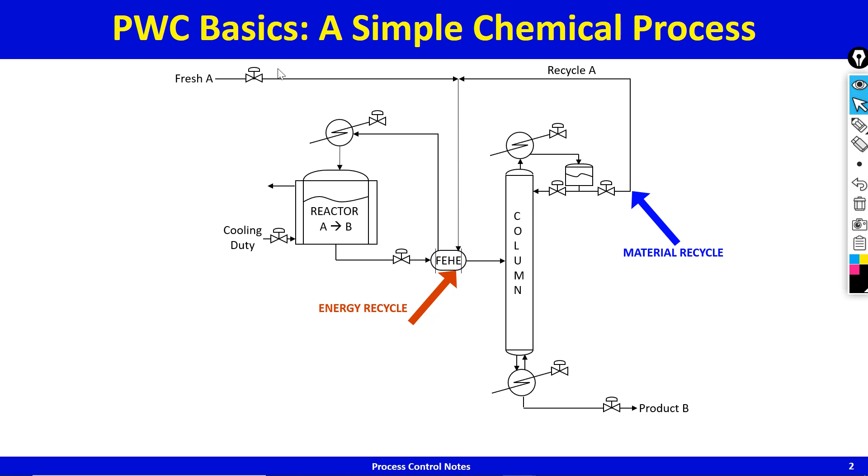The reactor effluent is hot. It loses some of its heat to preheat the cold feed, and the cooled reactor effluent then goes to a distillation column that recovers pure B down the bottoms and recycles pure A up the top. The key point to be noted, you have energy recycle in the feed effluent heat exchanger and the distillate is being recycled back to the reactor, and this is a characteristic of all chemical processes.

Process integration, it's called process integration, and it is good from the steady state operation point of view, from the profitability point of view, in the sense that material recycle minimizes the A consumed per kg B product. It maximizes the raw material utilization efficiency in the sense that every mole of A that you're putting in is leaving as product B. And energy recycle minimizes the steam consumed per kg B product.

So it makes absolute sense to have recycle, and so chemical processes are full of recycle. In fact, I keep saying this again and again, and I'll repeat, if there was no recycle, there would be no chemical engineering. So while this is good from the steady state profitability point of view, what recycle does is it creates two-way interaction, because the recycle can feed the disturbance back into the process, can feed a transient back into the process,

and that makes operation and control a challenging issue, which is why plant-wide control is not very well understood by anybody, or is very often misunderstood. I won't say it's not understood by anybody. There are people who understand it quite well, but then there are people who don't, and it is not even well covered in any of the textbooks, and so we're going to spend some time doing it, because I think this is important for anybody who wishes to work in the chemical process industry. In fact, it's important for any chemical engineer.

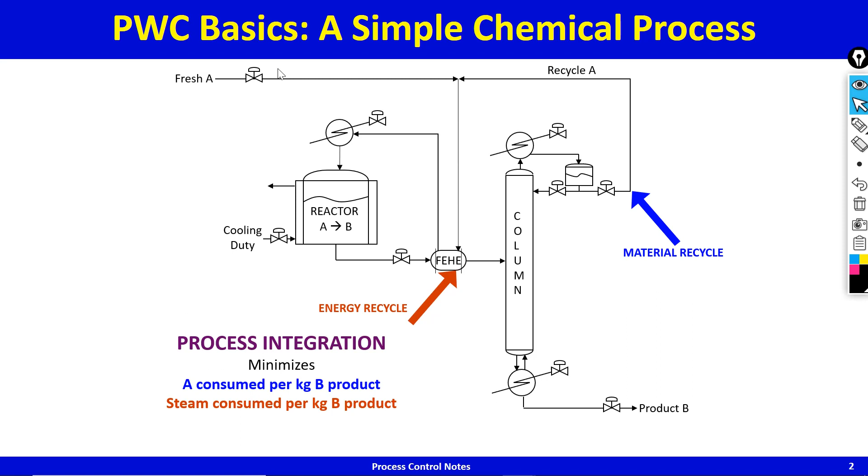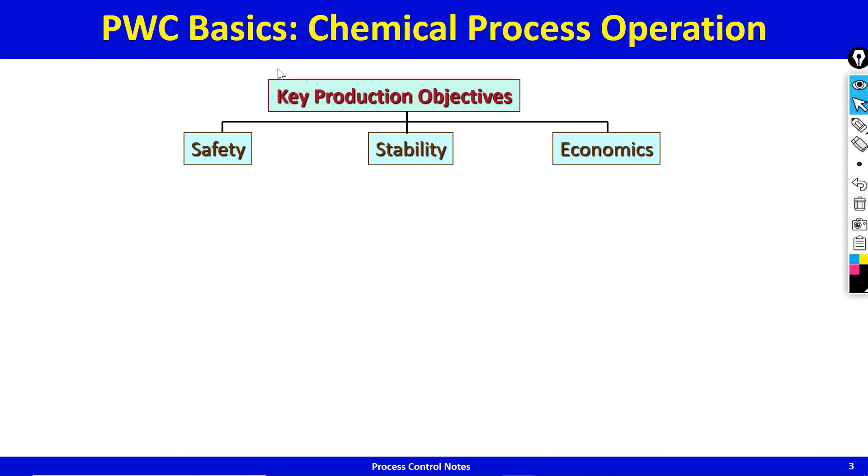So now we have chemical processes with all these recycle loops in there, and these processes need to be operated safely, stably, and economically, and economics is typically reflected in production rate, product quality, effluent specs. These need to be met all the time. We want to operate the plant to meet the production objectives all the time, 24/7. The production objective itself can change, and then there are always these disturbances, ambient conditions, raw material quality, the sensors are biased, have noise, equipment characteristics, new heat exchanger becomes fouled up over time, ambient conditions, rainy season, winter season, day night, raw material quality, very nice crude from Saudi Arabia today, sour crude from Nigeria tomorrow, but the process has to process all of this and produce good quality gasoline, good quality diesel, good quality aviation turbine fuel, and so on and so forth.

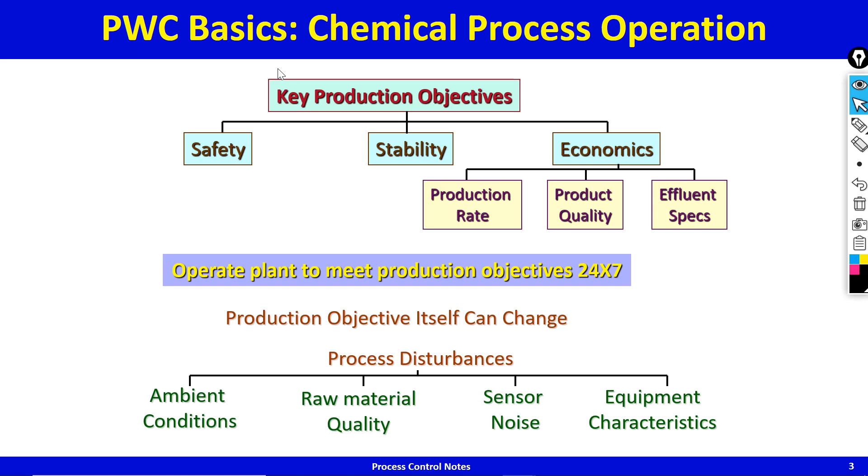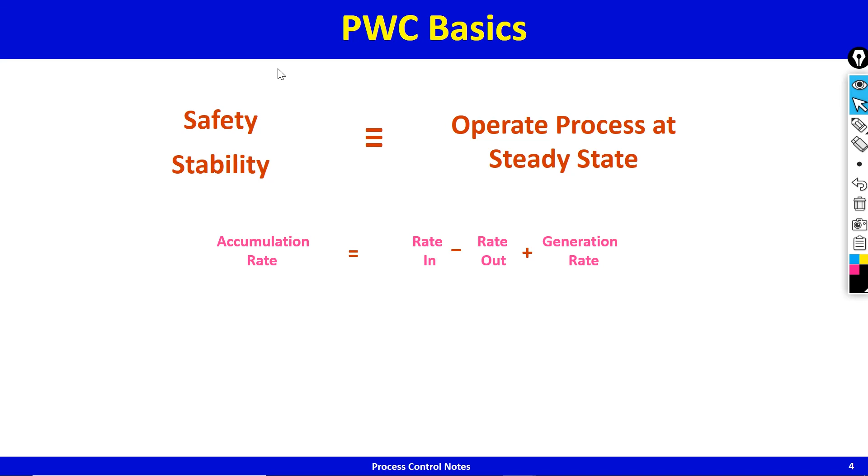Now, safety and stability in chemical engineering is typically guaranteed if you can operate the process at steady state. And how do you get steady state? Well, all that you do in chemical engineering is write balances for material, energy, components, and the accumulation rate of that particular inventory is equal to rate in minus rate out plus the generation rate of that particular inventory. And if you want steady state, this accumulation rate term must be driven to zero, and that's exactly what a control system does. It drives the accumulation rate term to zero by manipulating one or more of the right hand side terms, either the rate in or the rate out or the generation rate or a combination of the three. Usually you just manipulate one of the three.

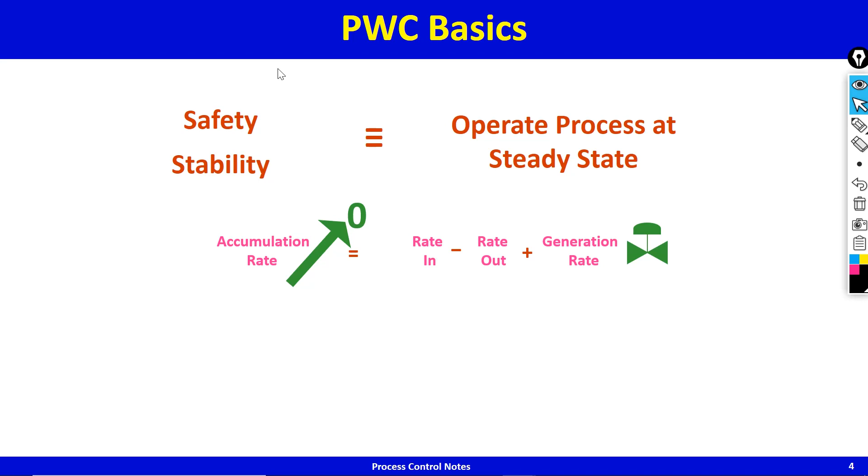So that's that. So you need a plant-wide control system at the very basic level to drive accumulation of all independent inventories to zero, and when the accumulation of the independent inventories is driven to zero, then safety and stability is ensured because the process is operating at steady state. Independent is the keyword there.

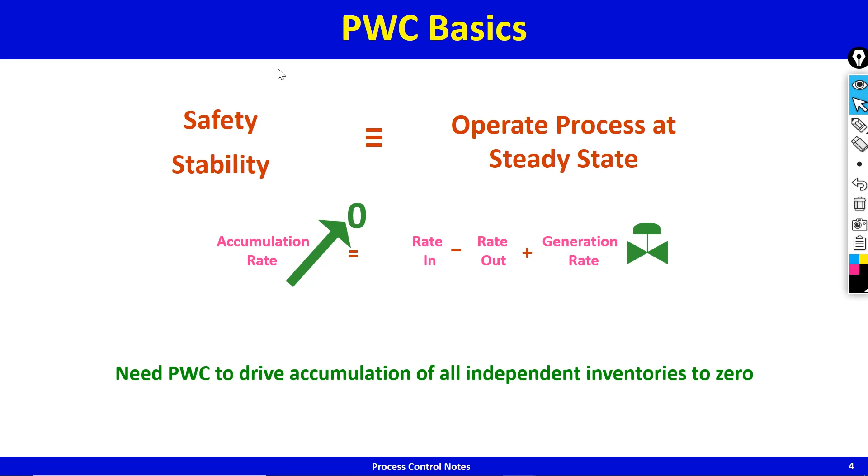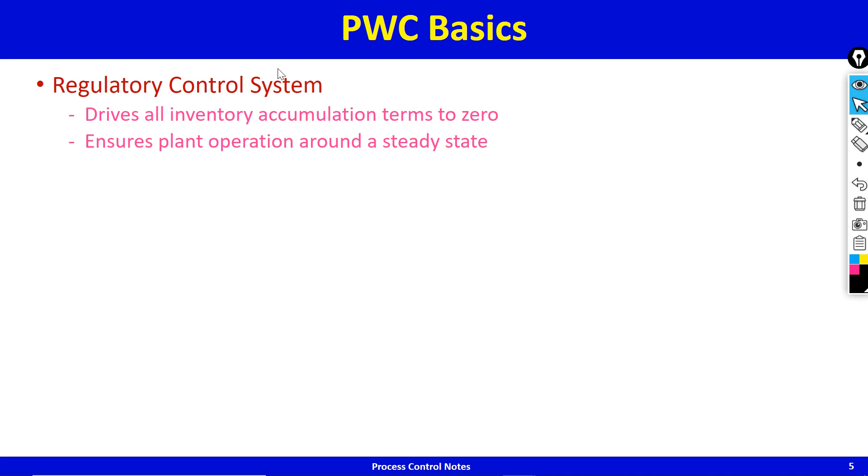So that's the purpose of a regulatory control system. It drives all inventory accumulation terms to zero, and that ensures plant operation around a steady state. And once you are assured that you can drive the process to a steady state, then you start asking the next level of question: what steady state to operate at?

For example, if you're riding a bicycle, you need to first learn how to balance the bicycle, and once you have mastered the art of balancing the bicycle, then you can start asking the question: what route should I take so that I reach from point A to point B in the least possible time?

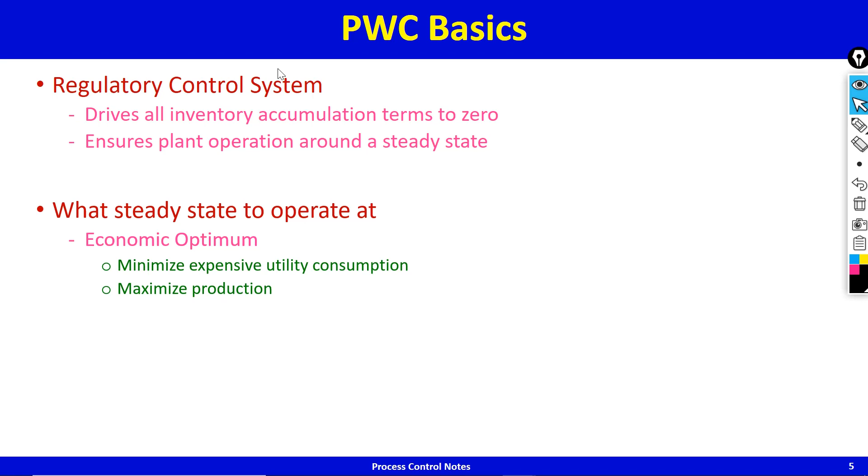Okay, so once the process has been stabilized to operate around a steady state, then you start asking the questions: okay, now I can choose which steady state to operate at, and the steady state to operate at is typically chosen to maximize or minimize an economic criterion. For example, you would like to minimize expensive utility consumption per kg product produced, or you would like to maximize production, and so on and so forth. So this is how plant-wide control systems are typically implemented.

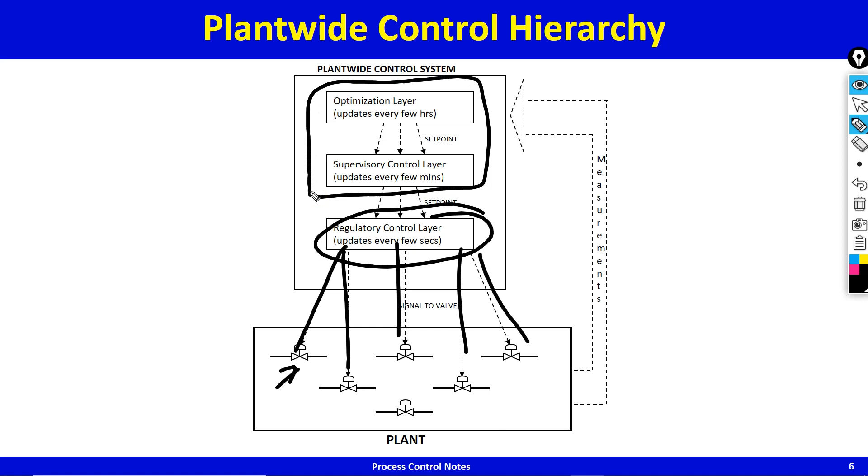At the base, you've got the control valves. These control valves are receiving set points from the regulatory control system, and the regulatory control system is receiving set points from an economic layer on top. And the purpose of the regulatory layer is ensuring steady operation which guarantees safety and stability, and the purpose of the economic layer on top is to ensure that the steady state at which you operate maximizes or minimizes, or rather optimizes, a properly chosen economic criterion.

So that's the hierarchy of plant-wide control systems, and now we're going to look at specific processes, and hopefully by the end of the course you'd be able to design a plant-wide control system no matter how complicated a process may look.

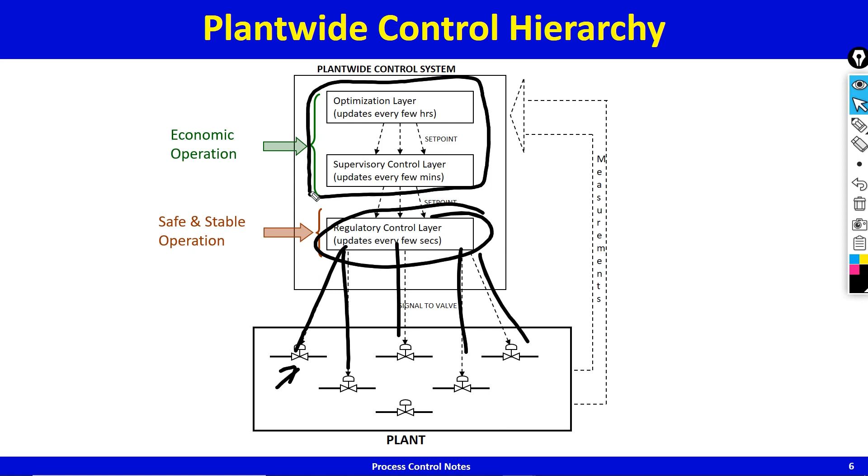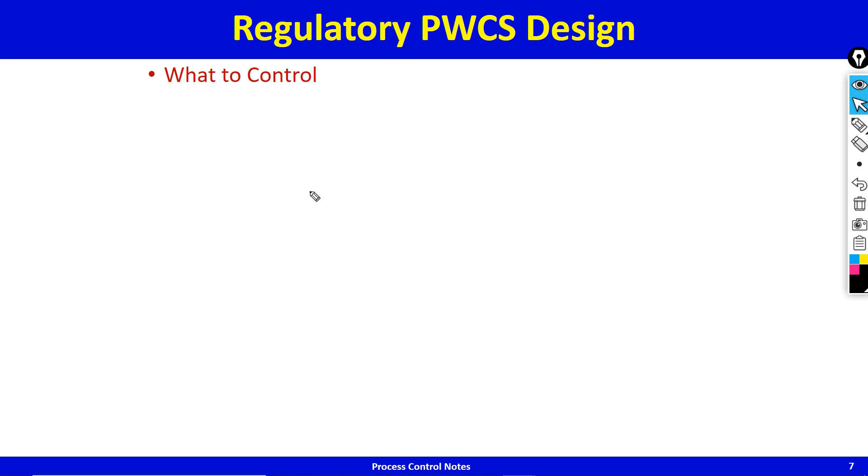Now, when you're designing a regulatory plant-wide control system, the key question is what to control. What should you control? Like we saw in degrees of freedom analysis, there exists tremendous flexibility in what to control, but purely from the regulatory perspective, purely from the perspective of ensuring that all steady state balances, all independent material and energy balances are closed, what you need to control are all independent inventories, and this is intimately linked to degrees of freedom analysis. Material inventories are typically reflected as liquid level.

If you have gas inventory, that will be reflected in gas pressure. Energy inventories are typically reflected in temperature, or if you are vaporizing something, in vapor pressure. Pressure of, for example, a distillation column is an example of the vapor inventory in the column, and if the pressure is increasing, that means you need to increase the cooling to close the energy balance, and so on and so forth. Component inventories are typically reflected in composition measurements.

On a distillation column, a tray temperature is an inferential measure of composition, in the sense that if the tray temperature is decreasing, what that means is the light key on that tray is increasing. So a decreasing tray temperature implies increasing light key composition in the tray.

Okay, so you need a good handle over degrees of freedom, and once you understand degrees of freedom properly, it is easy enough to figure what inventories to control. Then there is always the need to set throughput or production. In fact, you set the throughput first, and around that you build the inventory control system, the inventory regulatory system that will make sure that all inventory accumulation terms are driven to zero. So these are things that you need to control purely from the regulatory perspective. We are not talking about economics right now.

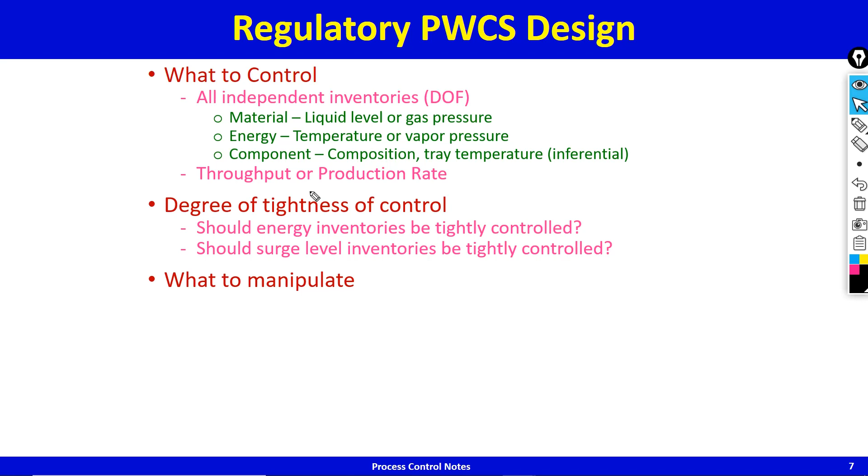Once you have figured out what to control, then the next question is what to manipulate. Well, typically if you looked at the balance, what would you manipulate? You would manipulate the largest term on the right hand side of the inventory balance for that particular inventory. This is called Richardson's rule. There can be exceptions to this, and there is always this pair close philosophy that is used.

For example, if you want to control a tank level, you're going to control the tank level using its outflow or its inflow. That ensures that when you change the valve position, the flow changes immediately, and as the flow changes, the level also changes immediately. That allows tight control. So pair close results in fast open loop dynamics, and fast open loop dynamics allows for tight closed loop control should you wish to.

Now the thing that I wanted to highlight here was that there's tremendous flexibility here, and this flexibility was partly seen in degrees of freedom analysis in terms of what are you specifying corresponding to those degrees of freedom. Are you specifying flows? Are you specifying flow ratios? Are you specifying temperatures, or a combination of temperatures, or a composition ratio? I don't know. So there's tremendous flexibility that exists in what you specify corresponding to the degrees of freedom. So what to control, tremendous flexibility exists here.

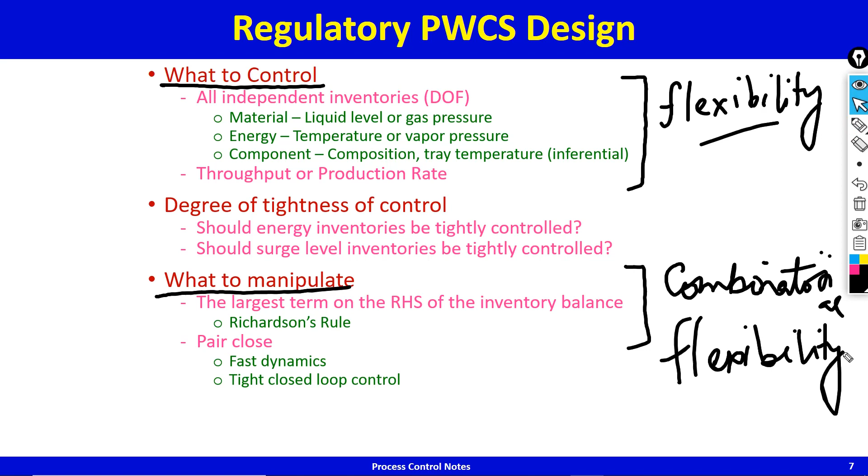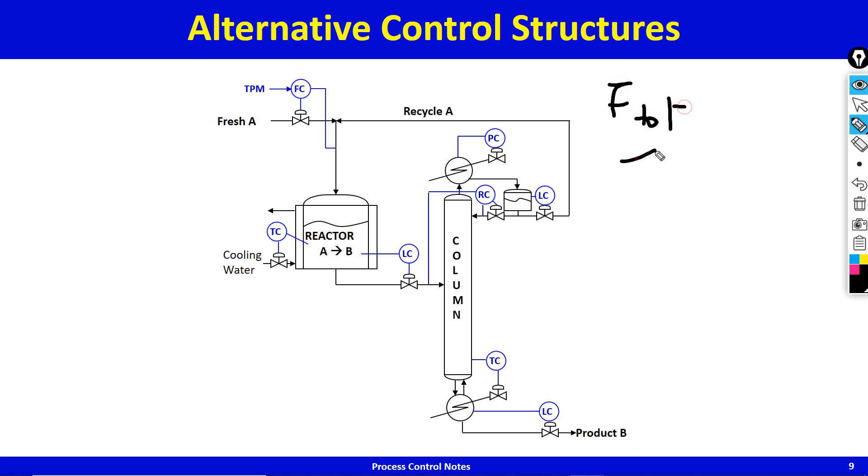So the specification set is different in only the throughput manipulator. Everything else is the same. By specification set, I mean we are specifying here F tot, T reactor, V reactor, L by F, and T column. These are the 5 steady state degrees of freedom corresponding to the control structure. In the previous case, if I go back, the only difference is instead of F tot, I am specifying fresh A feed. Everything else is the same. We can continue.

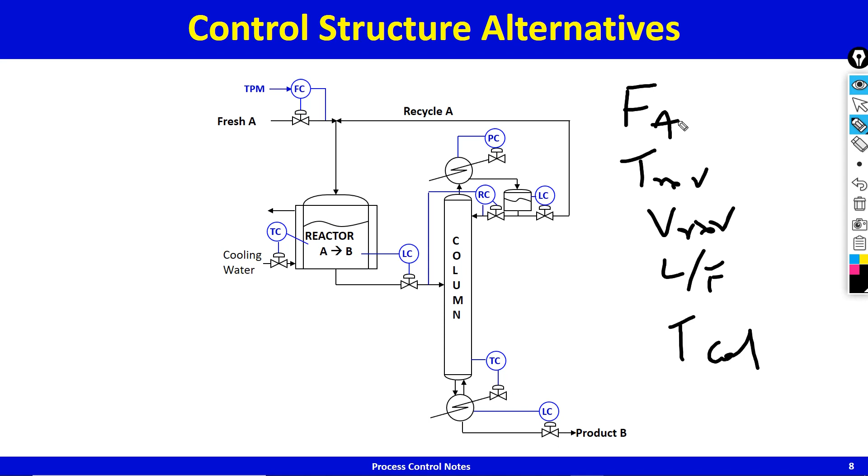In this case, the throughput manipulator is at the bottoms. So throughput is being set by the bottoms rate from the column. We'll call it the bottom rate B. And if we continue, now you see the sump level cannot be controlled using the bottom flow rate because it's already paired. So we control the sump level by adjusting the inflow, and this assumes that there are not too many trays between the sump and the feed, because if there are too many trays, then the level control will be very loose and the sump can run dry or overflow. So this assumes there are only a few trays between the feed and the bottom sump.

And now this valve, sorry, I think I made a mistake here. This valve is no longer available for level control of the reactor, so the level control of the reactor is this way. So you see, from the throughput manipulator, the orientation of the level controllers is in the reverse direction of process flow. Everything else is the same as before. So this control structure corresponds to this set of specifications. The only difference is production is being set at the bottoms rate. Okay, this will also work.

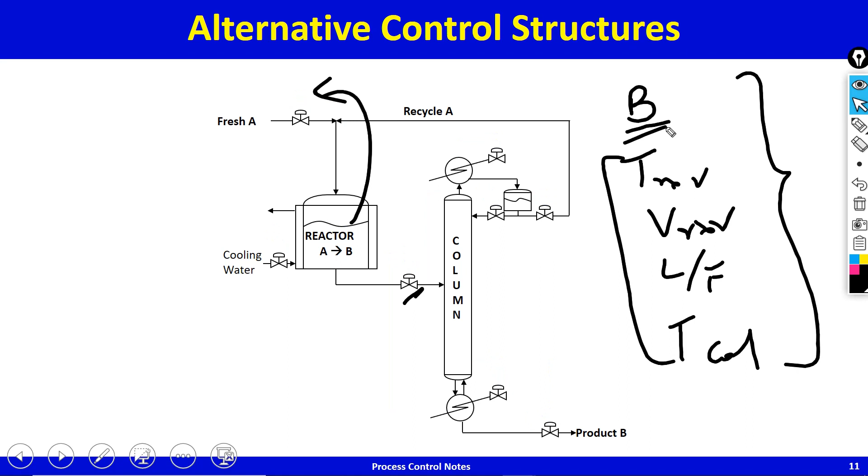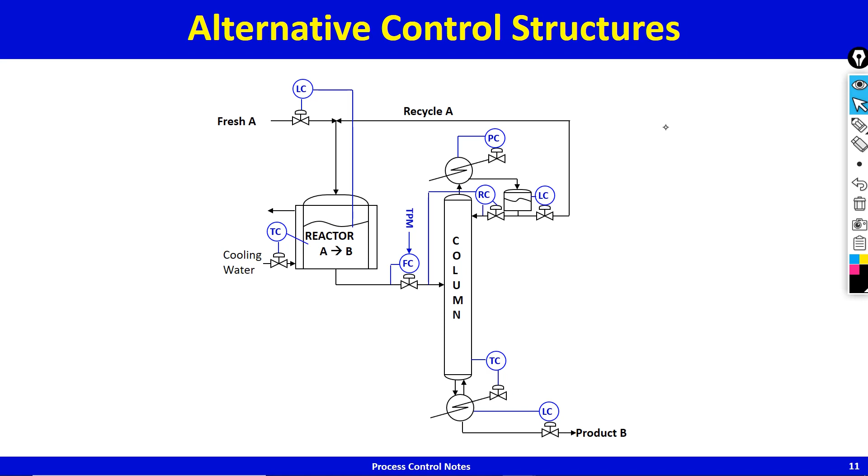You can keep going. Now we have production being set at the feed to the column, and so the level control upstream of the reactor is in the reverse direction of process flow. The level is being controlled by adjusting the fresh A feed. Everything else remains the same as in the first control structure, and in this case the controlled variables are all the same except throughput is being set at the feed to the column. We can continue.

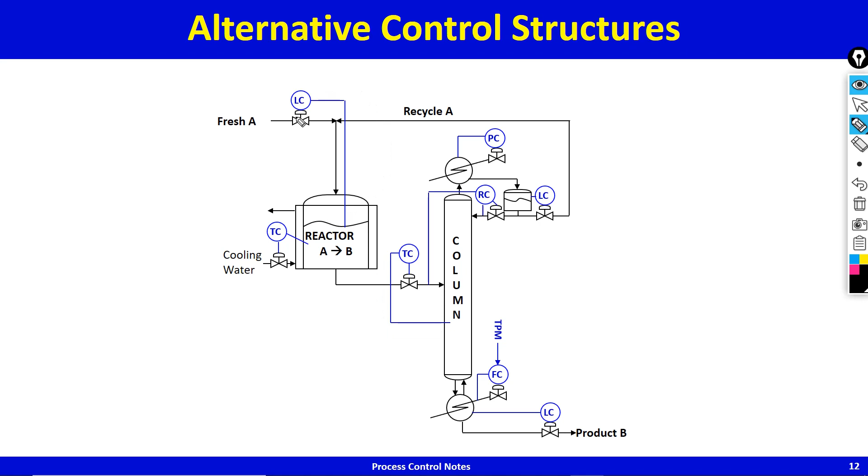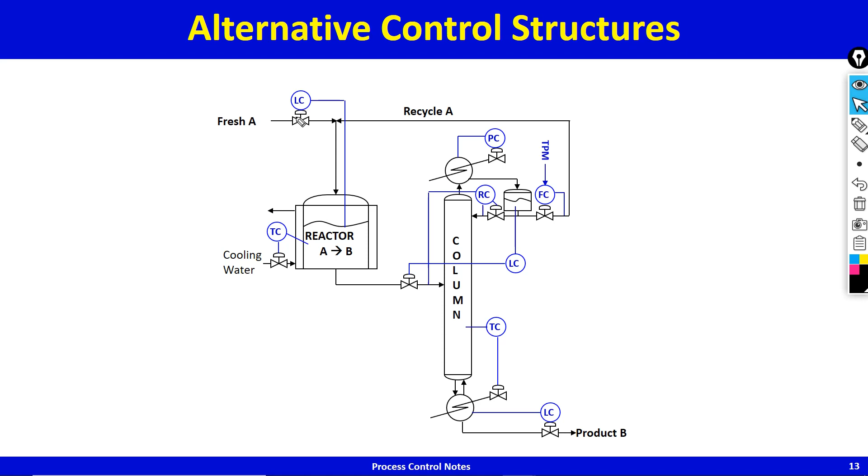You can set production as vapor boil up into the column, and now because vapor boil up is being used for fixing production, the column temperature must be controlled using the feed to the column. Level must be in the reverse direction of flow. Everything else is the same. You can go on and on and on. There's also a throughput manipulator at a recycle or the distillate from the column. I will leave the explanation to you so you can think about what is going on, but basically this is another control structure.

So the point is, location of the throughput manipulator is a key decision for inventory management. It's a key decision in the sense that wherever you set throughput, inventory controllers downstream are in the direction of process flow, inventory controllers upstream are in the reverse direction of flow. And there are several alternative reasonable plant-wide control structures depending on where you put the throughput manipulator. Which one is the best? How do you bring method to the madness? So the madness is because of two reasons. One, what to control, and two, once you decided what to control, what to manipulate. And what to manipulate is largely governed by where you are setting production. Okay, so that's the madness that we're talking about.

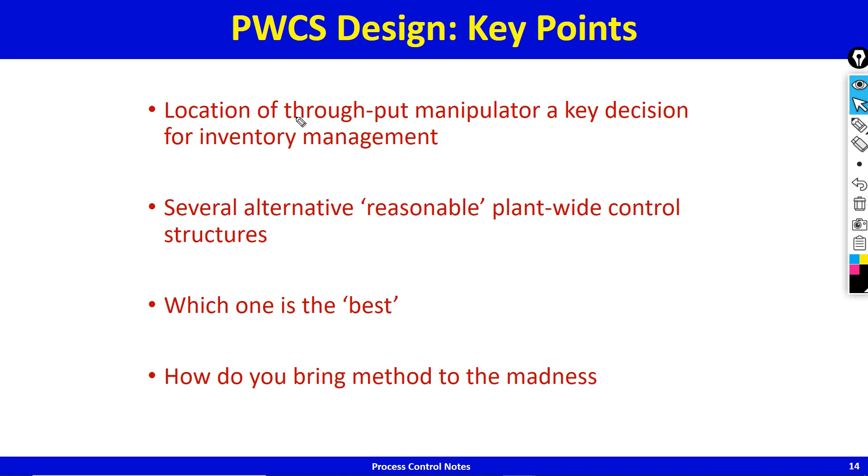Now, how do you address issues, or how do you address this madness? I refer to it as the transformation of variability perspective, and I'll explain to you what it is and then we'll carry on from there.

Very simple example, a process heat exchanger which uses steam for heating a process stream from an inlet temperature to an outlet temperature. The process stream flow can change, the process stream inlet temperature can change. If you have open loop operation, that means no control, the steam flow will be fixed.

Because the steam flow is fixed, the temperature of the stream that is leaving the heat exchanger, the process outlet stream temperature, will show variability. It will go all over the place because the process stream flow rate itself is changing, because the process stream inlet temperature is changing, and so on, because of disturbances.

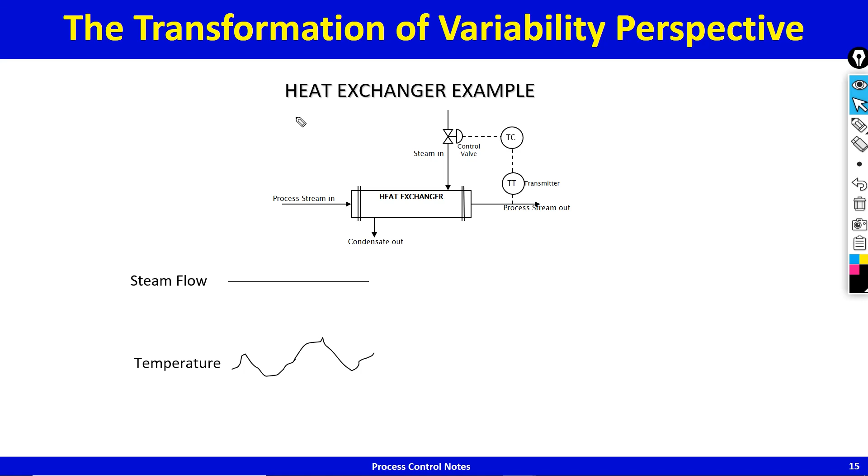This temperature controller manipulates the steam valve. Now if the temperature controller is properly tuned, what will happen is you will get reasonably tight control of the temperature, so the temperature variability will go down. And in order to reduce that temperature variability, the steam flow is going all over the place.

So in a sense, what your temperature controller is doing is transforming variability from where it is not desirable to where it is acceptable. That's the transformation of variability perspective. That's one way of looking at control systems. And this perspective is what has helped me figure out the plant-wide control problem to a large extent. I got this perspective from my PhD advisor a long time ago, and finally I do understand now what he was trying to convey.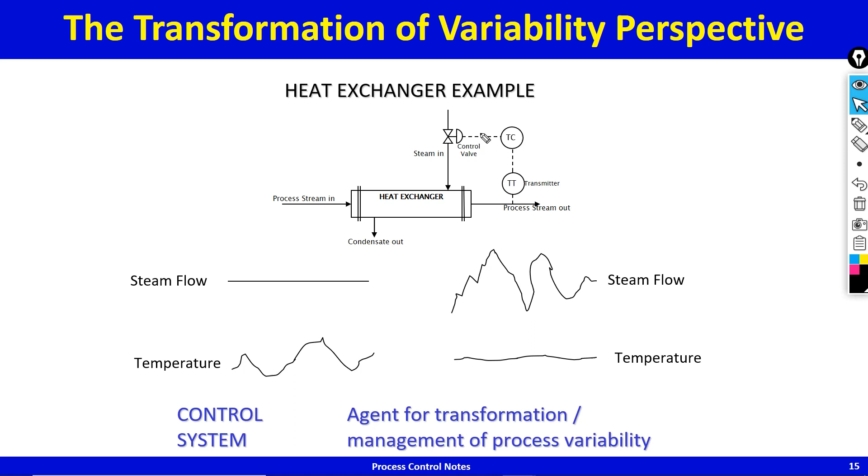So a control system is an agent for transformation or management of process variability. The key question you always ask is, where can we transform process variability? Where is variability acceptable? Surge levels, like we talked about, this does not affect the steady state, so it has no economic effect. We want to regulate it loosely for filtering out flow transients, while the high and low alarms are not breached, those limits are not hit. So variability in surge level is acceptable.

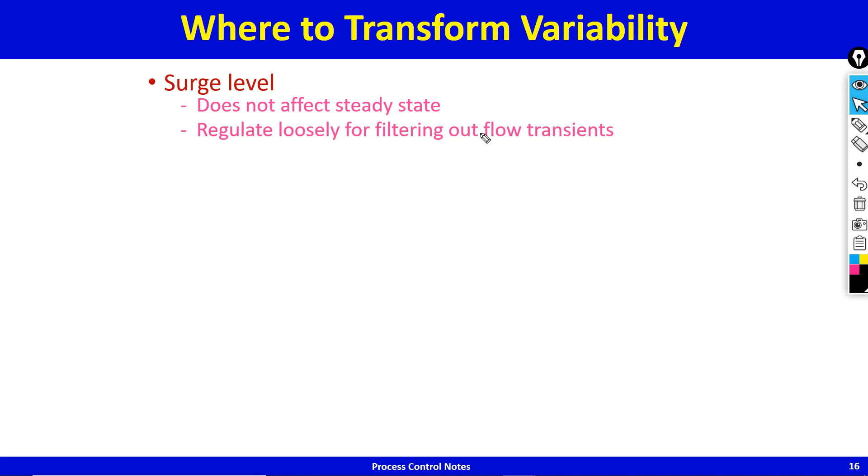Energy inventories, usually these are regulated tightly to guarantee safety because you want to avoid reactor runaway and things like that. Product quality is also usually regulated very tightly because you want to minimize free product giveaway. For example, if you have 99% pure product, you want to sell 99% pure product, 1% impurity should be there. If you are selling 99.9% pure product, then that's essentially free product giveaway.

And mind you, the premium that you can charge as the quality improves is exponential, not linear. So 99% costs X, 99.5 will cost, let's say, X plus delta X. 99.9 will not be X plus 2 delta X, it's going to be exponentially more. So the premium you can charge to the customer grows exponentially as the quality is controlled tighter and tighter.

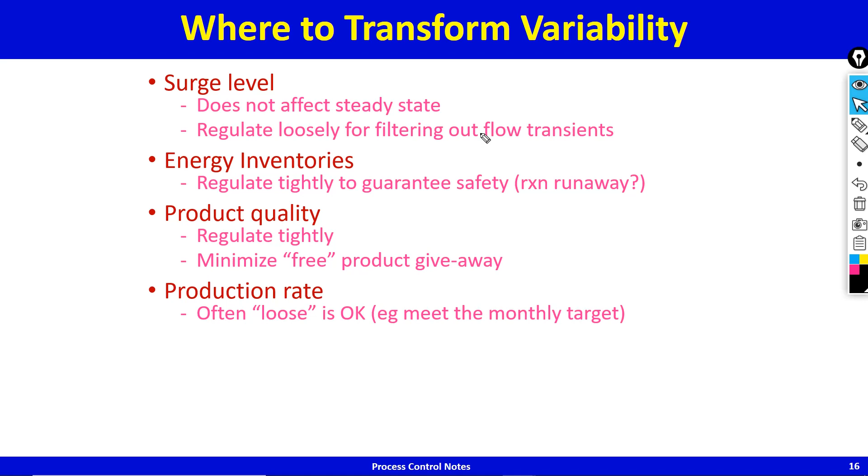Production rate, often loose is okay. For example, a plant will have a monthly target. The business side will say, our analysis of the demand supply gap says we can sell so much, so your target for this month is to produce so many tons of product. So on a daily operation basis, you don't have to operate on target all 30 days of the month. On some days you can be high, on some days low, on some days right where you need to be. So some variability in production rate is okay. Production rate needs to be controlled, but often loose control of production rate is just fine.

What about recycle loop circulation rates, or the recycle rates? Usually these need to be regulated tightly, and if the recycle rate variability is well regulated, then the recycle rate doesn't swing as much. If the recycle rate doesn't swing as much, all equipment in the recycle loop sees relatively fixed flows, and that's good for all the equipment inside the recycle loop. However, one needs to be careful in the sense that we may need to let the recycle rate float in order for the overall balance on a plant to close.

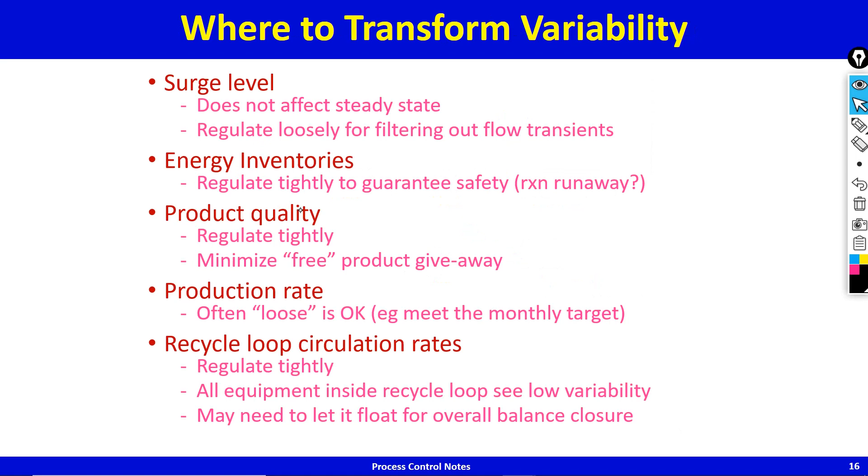We've got feed at temperature T0 coming in. Let's say the reactor effluent is hot. So the hot effluent gives some heat to the cold feed. Cold feed gets heated, and then it gets further heated to the reactor inlet temperature in a heater. The hot effluent after cooling goes to a cooler, and everything condenses. The condensate is taken out as liquid. That's the process.

Now let us say we are running the process without any temperature control. So basically the firing rate is fixed. If the firing rate is fixed, that means the energy input is fixed. Then let's say the temperature of the in stream goes up. Also the assumption is that the reactor single pass conversion is not large, maybe 30, 40, 50%, but certainly not 90, 95%. So low or moderate single pass reactor conversion. So there's enough unreacted reactant in the exit stream of the reactor.

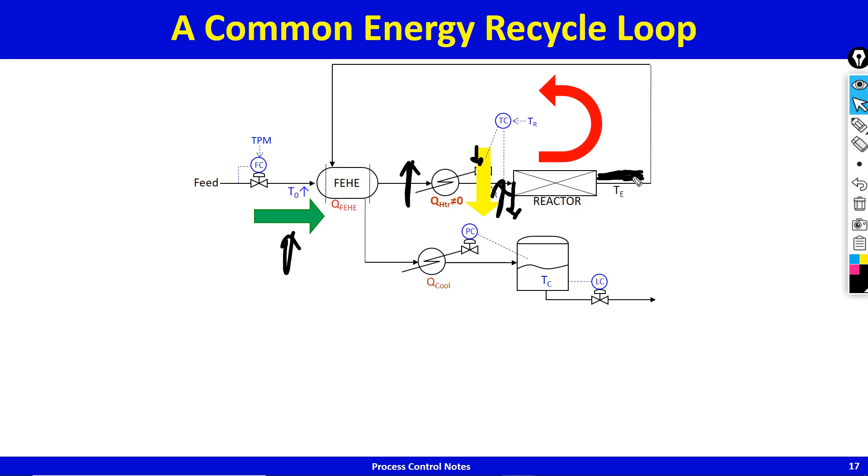It won't go as much up. It'll go up a little bit, but then it'll come back because the inlet temperature has been brought back. You see, what is happening here is the action of the reactor inlet temperature controller is transforming the energy balance variability out of the recycle loop, and this will stabilize the process. So the temperature controller transforms energy balance variability out of the recycle loop, and this actually regulates the rate of energy transfer in the feed effluent heat exchanger.

When you did not have the temperature controller on, when it was on manual, the energy transferred in the feed effluent heat exchanger went up and up and up. That's called a reactor runaway. But if you control the reactor inlet temperature, reactor runaway won't happen. I think it's easy enough to see that it doesn't really matter, as long as you control some temperature in the recycle loop, the runaway will be prevented. So that's the key message from this very simple example. You want to transform the variability out of the recycle loop. That's the message.

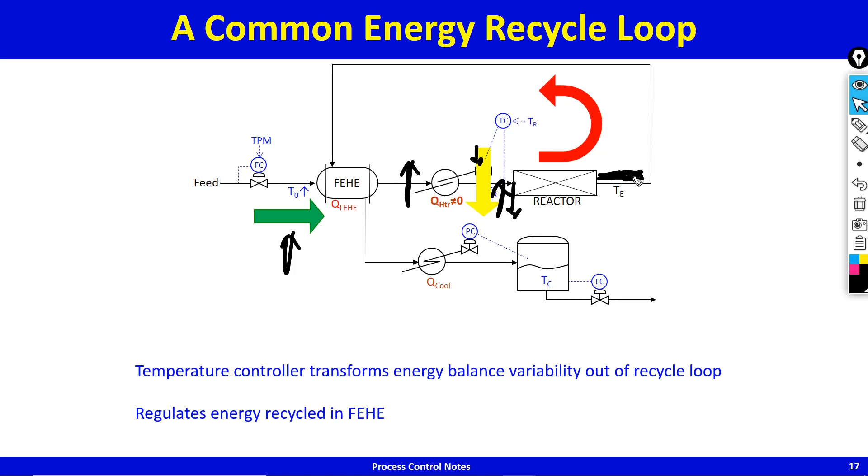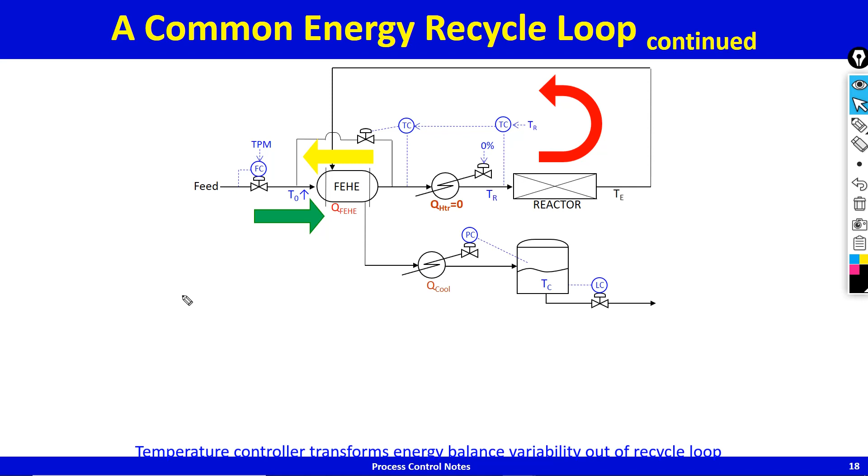Now, here's another way of doing it, and I won't go over it. Let it be. Material recycle snowball effect.

So you see, in most systems the reactor is quite expensive because the catalyst is very expensive, and so the design will have a small reactor volume and a low single pass conversion. If you have a low single pass conversion, the recycle rate would be high, and if the recycle rate is high, what you find is, if you increase the feed rate 5%, the recycle rate doesn't go up 5%, recycle rate increases, I don't know, maybe 20%. So the gain or the sensitivity of recycle rate to production rate changes is actually quite high. This is called the material recycle snowball effect,

and it's figurative. So if you're fixing the fresh feed, those are the set points that affect the steady state, then a small change in the fresh feed rate will cause a very large change in the recycle rate. This is called the snowball effect. Right now we are showing pure A. It could be that A contains a solvent and the composition of A in that fresh feed goes down or up. What that means is, if the amount of fresh A that you're putting in varies, the recycle rate will vary a lot.

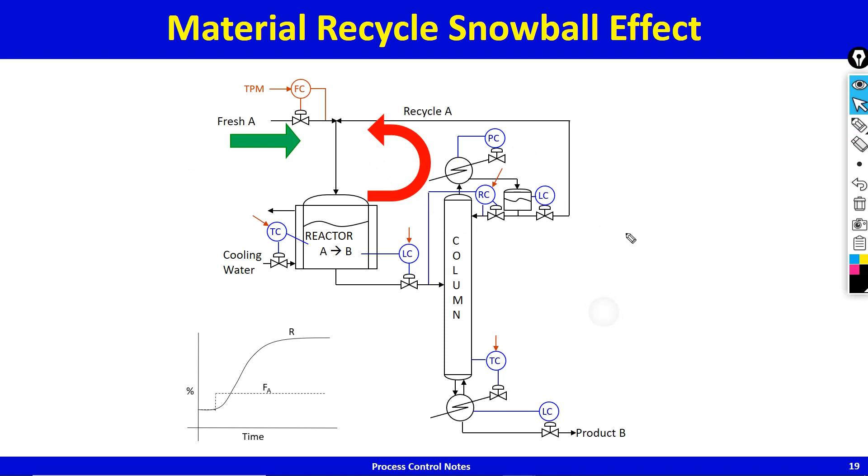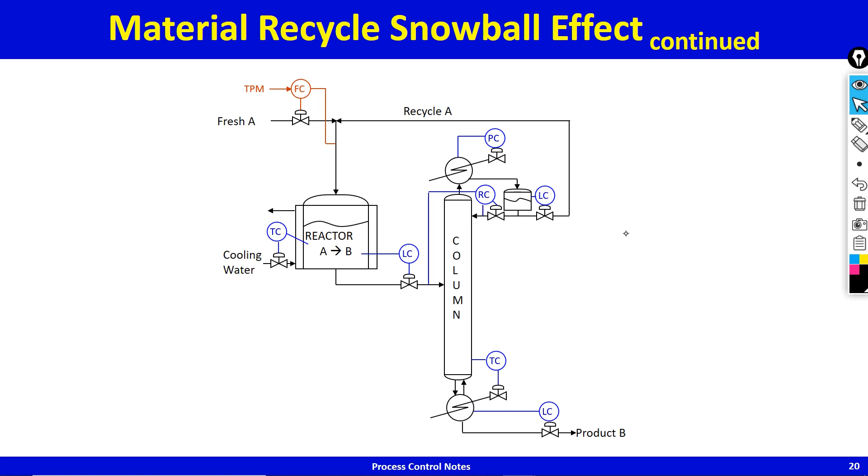So let us say you are operating the process with this control structure where the total flow to the reactor is fixed and the fresh A feed is being brought in as a makeup stream in order to hold the total flow to the reactor fixed. In this case, even though the nature of the process is such that if there is variability in the fresh A feed rate, if there is variability in the composition of the fresh A stream, then the recycle will show large swings. In this case, the action of the throughput manipulator is such that it transforms variability in the recycle rate out of the recycle loop.

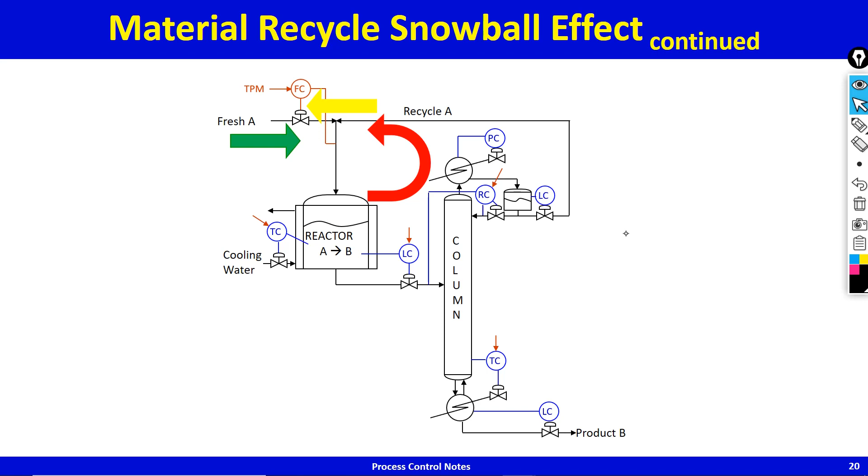That being the case, now let us say the management, same management with this control structure, comes to the operator and says crank up production. Now you see, I can crank it up gently. I can crank this up, the total flow rate set point, gently, and take it close to whichever is the unit that hits a maximum limit. So let us say the column flooding is the unit that hits maximum limit, and variability in the column vapor rate is this much. You see, now I can take this with confidence because the recycle flow is reasonably fixed.

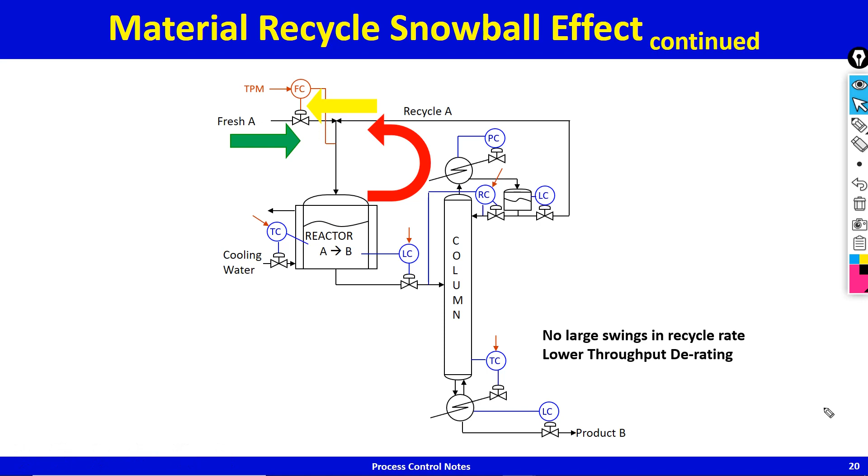On the other hand, if I had the previous control structure, then the variability in the column boil up would have been much more, because not only is it rejecting other disturbances, it is also rejecting disturbances due to large changes in the feed flow to the column. Right now, in the black case, the variability in the feed flow to the column is much less. Because the variability in the feed flow to the column is much less, the variability in the boil up is much less. Because the variability in the boil up is much less, I can get closer to the flooding limit of the column, which is that max. Yeah, so in this case, there are no large swings in the recycle rate, and therefore the throughput derating would be lower than the previous case. Yeah.

The key guideline that emerges from both these examples is that you want to structure the control system to transform variability out of the recycle loop. How do you do that? You do that by holding what's going around the recycle loop constant. In an energy recycle loop, you hold a temperature inside the recycle loop. In a material recycle loop, you hold the component rate going around the recycle loop. And the material balance control structure will then bring in the fresh component which are recycled as makeup streams.

If a component is not recycled, then there is no problem because there is no recycle of that component. That particular component, you can have flow control of the fresh feed. But if you are putting in a fresh feed and that component is being recycled, then you should hold a flow in that recycle loop so that the fresh feed of that component is brought in as a makeup stream. That's the key guideline that emerges for recycle loops from these very simple arguments.

And with that, I think I'll end this lecture. We will further discuss the snowball effect in the next lecture and see further reasons as to why it is recycle rate that should be held constant and not the fresh feed.